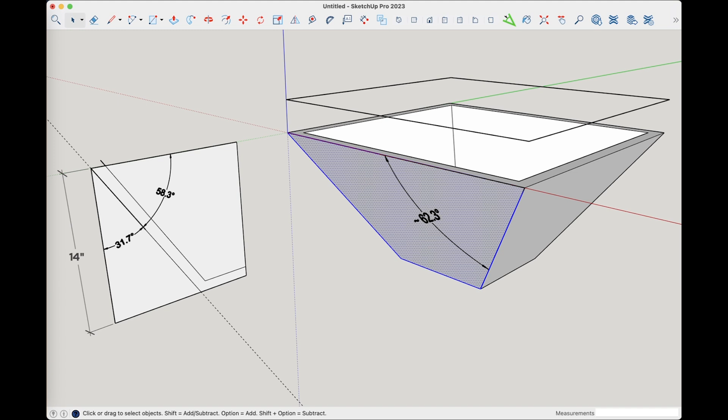So first, let me hang on to the one that we have. I'll just select that, and I'm just gonna group everything, and then we'll move that out of the way of where we're gonna draw. Okay, and I think that what I wanna do first is make the frustum a little bit shorter. I think that's gonna help with the proportions. Right now it's 14 inches, so let's try 12 and see what that does.

So I'll draw myself a guide, and we'll keep that same 1 inch dimension here. And then I'll just draw a couple of line segments real quick. I'm gonna do this pretty quick; I'm not expecting anyone to follow along. The point obviously is to show what it takes to do this by brute force in SketchUp, and then compare that to the parametric way. So if you're trying to follow along, don't worry about it. If you're fast enough to follow along, fantastic, but that's not the point of this particular exercise.

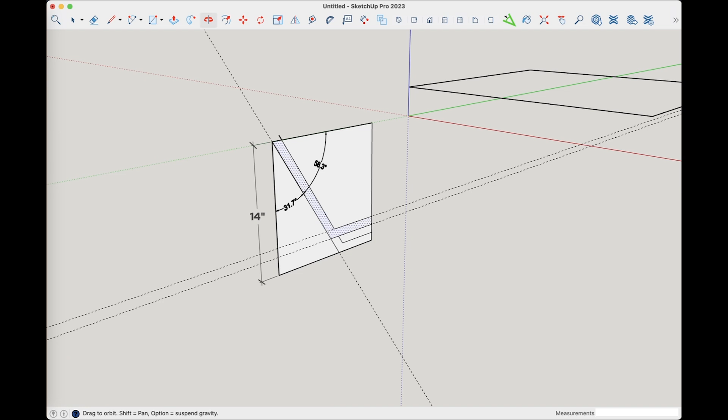And all I need to do is get rid of that segment there, and that will open up that part of the profile that we'll then use the same way that we did before as part of the Follow Me function. Okay, so let me look at this from an ISO view and zoom out just a little bit. Like before, I'm going to copy that over to the origin here, and then I'll select the path. I'll go ahead and select Follow Me.

And now, if we look at these from the front, we should have our same angles, right? Nothing changes, it's just shorter, still 62.3 degrees, but that looks a little bit better to me. It looks a little bit more balanced, the one on the left that's shorter than the one on the right that looks a little bit too tall and top heavy.

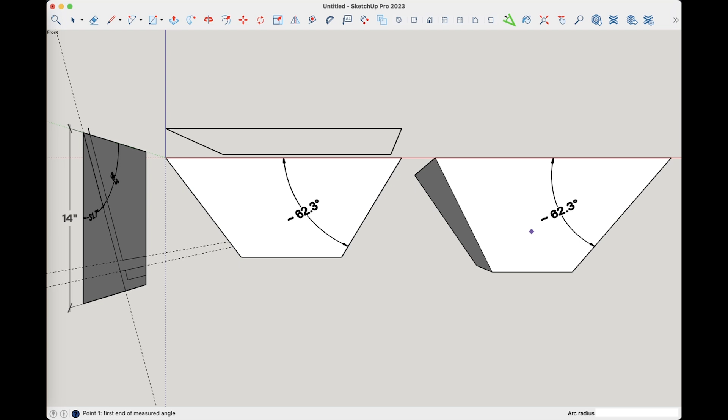So as we mentioned, ideally we're coming in at 14 to 16 inches tall for a fire bowl or fire pit. We don't want to be much taller than that. Shorter is okay, but ideally we're at 14 to 16 inches tall. This one's 12 inches tall, a little bit short, but again, proportionally looks better to me.

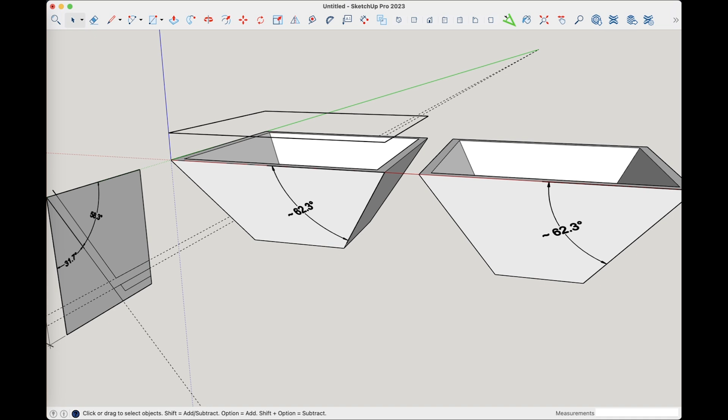Now, another way that we can augment our design here, let me go ahead and group this and get it out of the way as well, move these guys over, is instead of making it shorter, we can keep it the same height, but make the opening bigger. So if we move it from 28 to something like 32 or maybe even 36, I think the proportions will come better in line as well. So let's try doing that.

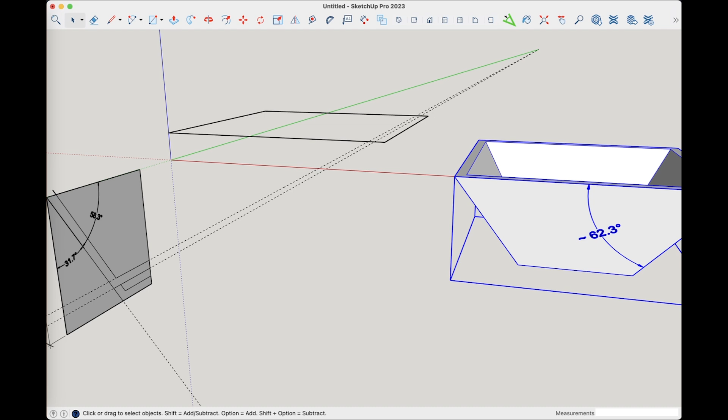So just like before, we'll draw another rectangle from the origin, using the rectangle tool. In this case, let's start with 32 by 32, just to see where that gets us. I'll need to get rid of this face, I don't need it. And I want to move that up from the origin just a little bit.

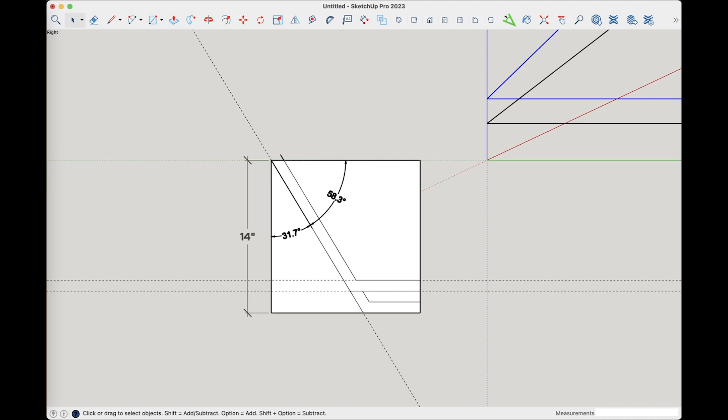Let's go ahead and return our profile here back to what it was before, that 14 inch height. I'll just move this line segment, close this one back off, and now we've got that. Let's go through the exercise again. I'll go to ISO view, copy that over to the origin, select our new path, the 32 by 32 path, select this, and now let's look at that from the front, zoom extents.

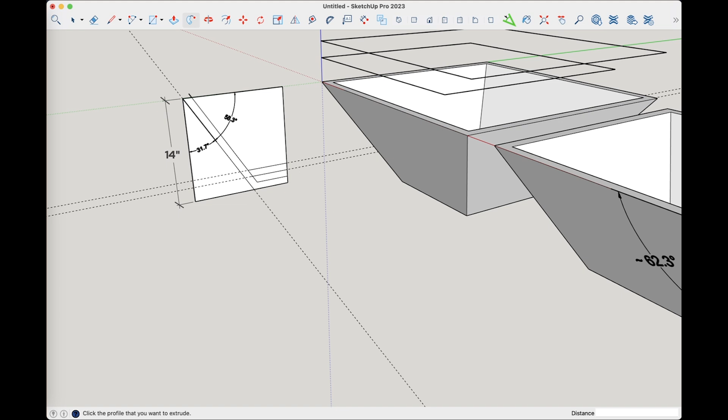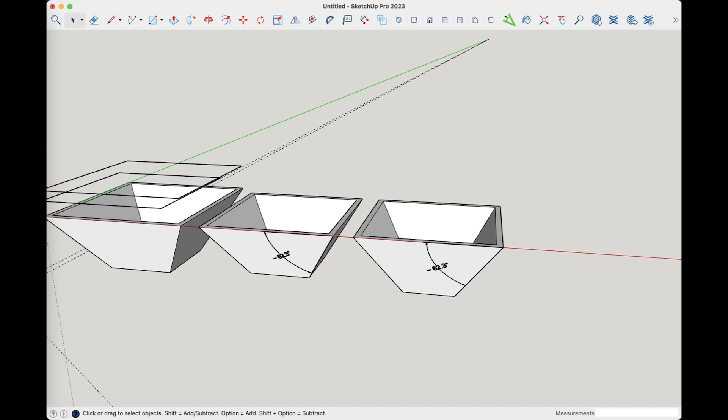That also looks better to me than this original one, but it is bigger, right? So it is 32 by 32 rather than being 28 by 28. And maybe 28 by 28 was all of the real estate that we were given, right? So that's kind of a consideration as well. But again, this one looks much more balanced than this one does, for the same height, right? So 32 by 32, 14 inches tall; 28 by 28, 12 inches tall; 28 by 28, 14 inches tall.

Another thing that we might want to do is play around with the different side angles. So we've got this kind of dramatic side angle here. Remember, we recognized a different side angle that was much steeper, 24.5. That also might be helpful. So let's go through the exercise and model that.

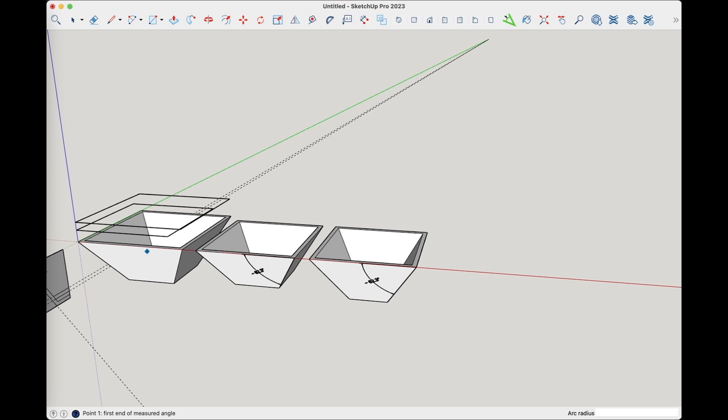Same thing here. I'll go ahead and annotate this guy right here. I should have annotated the heights as well, that would have been helpful, but I think we'll be able to follow them. So 62.3, select all that, select this, group them together, and let's move all of this stuff out of the way. I'm just moving right now, but tagging will actually be a better way to do this. Let's go ahead and move that.

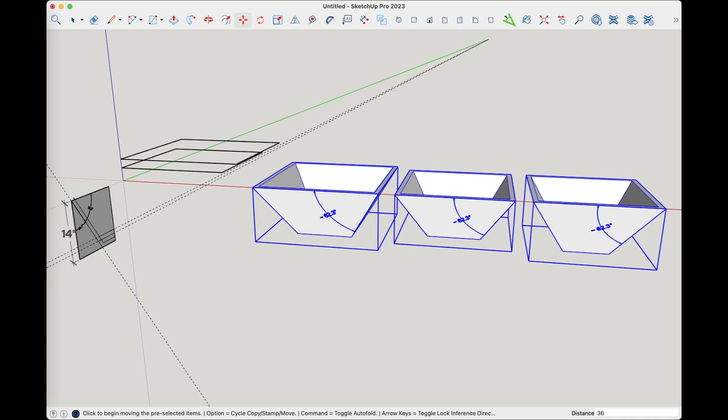All right, now let's change the side profile to that 24.5. So let me look at the model from the right-hand side, and zoom in on this right here. Let me just select all of this, and we will group that, and move it out of the way as well. So 20 inches, I guess.

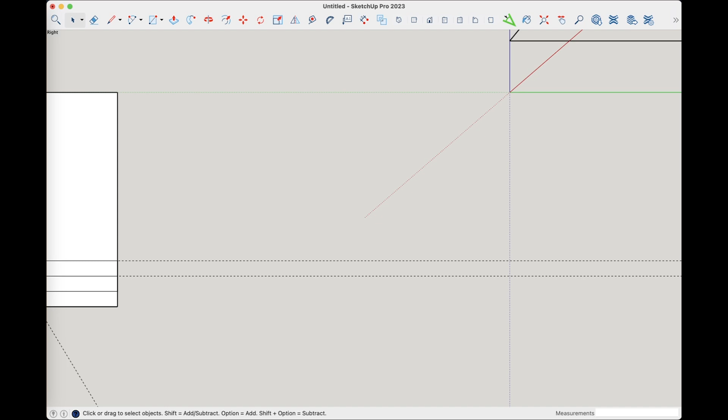Now, if you recall, the way we did this was we drew first a helpful bounding box, so 14 by 14, so we'll do that again. And then this over, we drew our guide here, so that now we want to be 24.5. That gives us that whole number blade tilt of 40 degrees. And this is going to be a much steeper side angle.

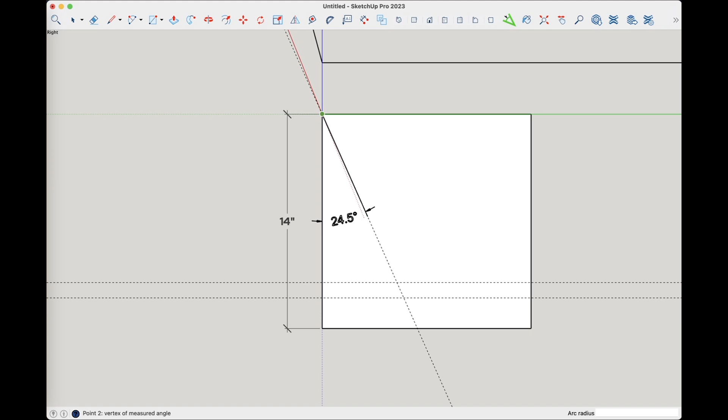Let me just go ahead and annotate these things real quick. So this will be, again, 14 inches tall. And this side angle will be 24.5, and its complement will be - what is that - 65.5, is that right? Draw our line to represent the side. We'll go ahead and select this and this, and do our thickness, 1 inch. And there's our alternative profile with a much steeper side angle.

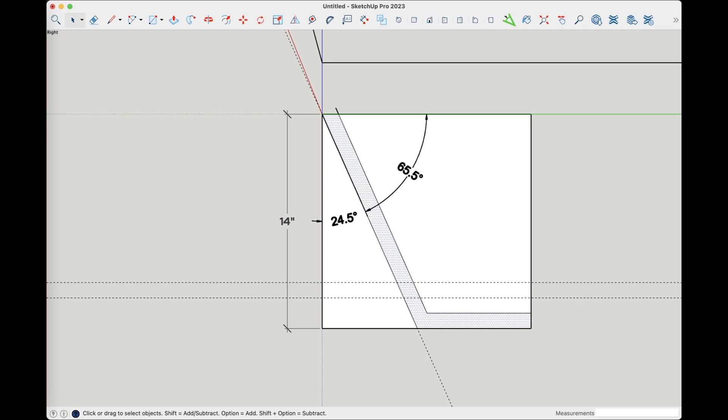Let's play around with that. So remember, we want to move this whole mess over so that we can get it out of the way of the origin. Let me just take the move tool, grab this corner and move it out of the way just a little, and we will copy move this new profile. Why don't we start with our 28 by 28, follow me, new profile, and then let's look at that from the front.

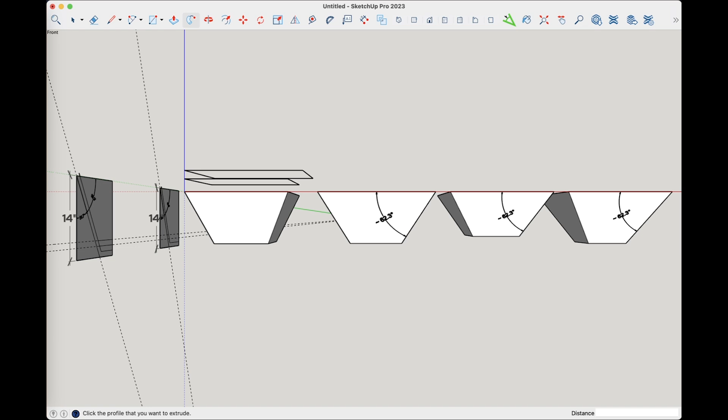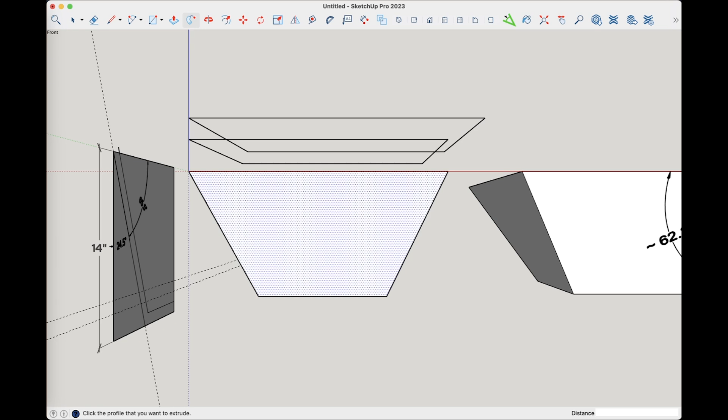That also looks better to me. So this is 28 by 28, it's also 14 inches tall, so just like our original, but a much steeper side angle. Looks more balanced to me than does this one over here, right? Again, this one is just giving me real fear of tipping over and causing a big old problem, whereas this one over here just looks more balanced and stable. And it's the same top dimension, 28 by 28, same height, 14 by 14, just a steeper side angle.

So let's go ahead and annotate this guy here, and select that.

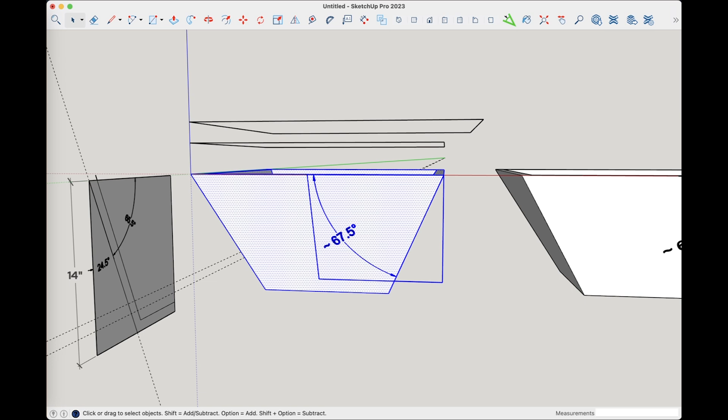And I'm not doing this on purpose, but this is getting tedious in a hurry in SketchUp, doing all of this manual mumbo jumbo. Select these guys, move all this stuff over, 2 over, 36 over. All right, let's try it one more time, but with that larger top open.

And mind you, all we've done so far is try a couple of different heights and 2 different side angles. We haven't played with the thickness of the frustum at all. We haven't changed much in terms of the proportions. Everything's been pretty rudimentary in the changes we've made so far, and it's getting tedious.

Nevertheless, one more, let's try it one more time. We will, again, copy our profile over, center, select our bigger opening, get it from the front. So much more balanced, but that one's almost a little too boxy. So it sort of depends on the situation.

I would imagine if that were a much bigger profile, like right now it's 32 by 32, but if we got to 36 or 48, it would look way too boxy, whereas something like this would actually look more pleasing. But again, we'd have to run through some more iterations to do that. You get the kind of idea.

Now, we could do some things here to organize a little bit. So one of the things we could do is tag things. So as an example, I could tag all of these. Let me go ahead and go to tags. We're going to need to create a new tag for this. We'll call this, this was the 31.7. Okay, I've got a new tag defined, and then I'll just enter the info, tag all of these with that.

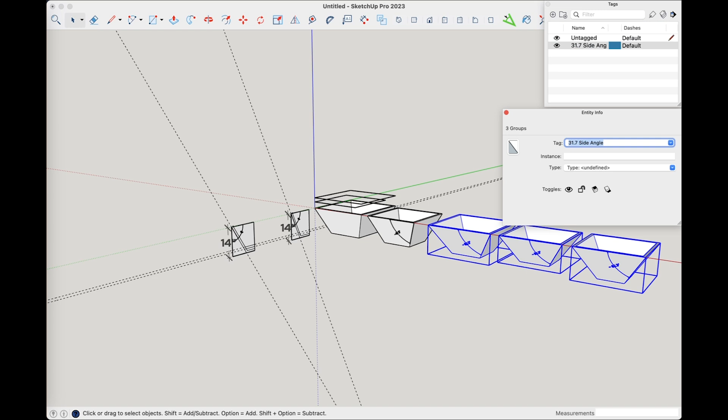And the benefit in doing that is I can now use tags to show and hide what's in my model. So you can have a bunch of stuff in there, but sort of unclutter it. We'll do the same thing with these two new ones that we just drew.

So let me annotate this real quick, select all that, plus that, and we'll tag those two. Let's create a new tag, and that is our 24.5 degree set. Entity info, tag those, okay.

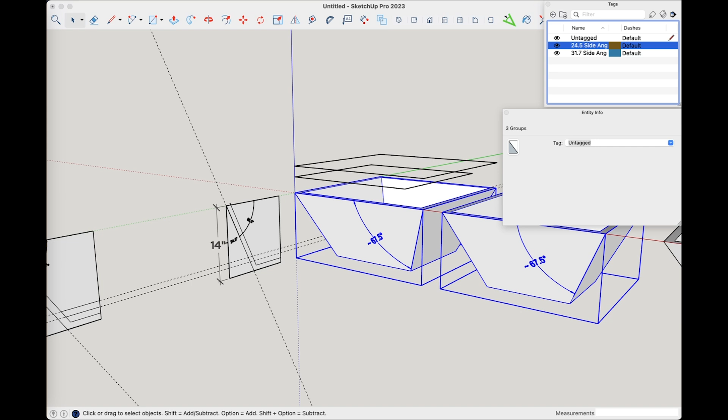And then if we zoom out, right, we can, I guess it would make sense to tag this as well. Let's tag this whole mess, including this, group that, tag that, show and hide that stuff. And then the same thing with this one. Entity info, that one is going to be our 31.7, right? And so we can do the same.

All right, so there you go. I didn't really create that many permutations, 5 total. One was the existing one. And then there were 2 permutations of that with the same side angle. One was shorter, one was the same height, but a bigger top. And then I created 2 more with the steeper side angle. Both of those the same height, one with a 28 by 28, the other with a 32 by 32.

Now, as you can see, this can get tedious in a hurry. We could either save each of those permutations as a separate design file or go through some sort of complex tagging approach to keep things organized. Now, adopting an approach like this at scale would be an absolute nightmare in my opinion. I could do the same in Fusion, but luckily there's a much better way.

So in this video, we're going to introduce a concept called parametric modeling, which, as I've started to ramp up on Fusion, has completely changed my perspective for the better on using it. Now, if you're not familiar with it, parametric modeling is a design approach that enables you to create 3D models based on a set of parameters or variables. These parameters can include dimensions, angles, distances, and other geometric properties that drive the shape and size of your model.

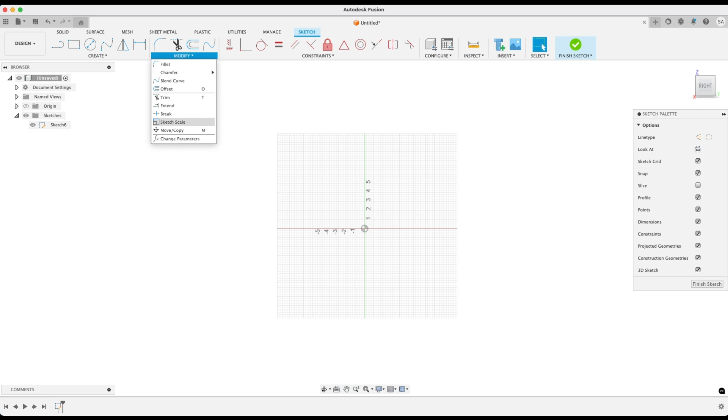And before we do anything else, let's now define several parameters. There's a few different ways to get to it, but one way is under the Modify menu, where you'll see this item, Change Parameters. You'll notice that we can now add user-defined parameters by simply clicking the plus sign, and the first one we'll add is height.

You'll notice it defaults to a dimension in inches, based on my default unit of measure, and that's exactly what we want. Now, for each variable, you can enter an expression that Fusion will evaluate for the value, but hold that thought, we'll come back to that. Keeping it simple for now, we'll just type in 14, which is the same height we used before when we modeled our first iteration.

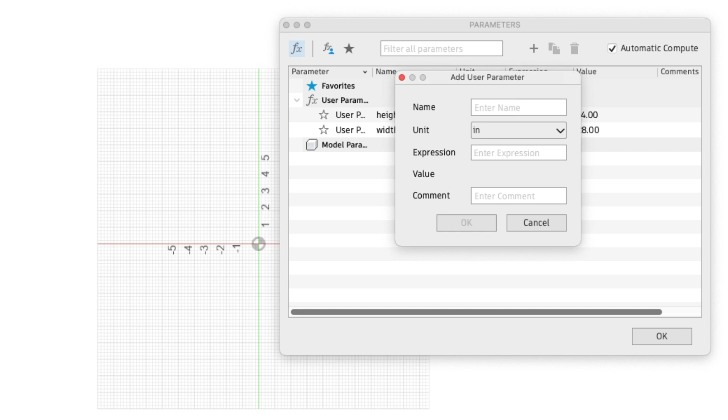Okay, next, even though we're using the same value, let's actually add two for the top dimension, width and length. For width, let's go ahead and enter 28 inches, just like our initial model. And for length, we'll get a little fancy and enter an expression of width. Notice how it knows the value of that variable. This is the simplest expression you can enter, where the value of one variable is exactly that of another.

But again, baby steps. Now let's see this work. Let's change the width, notice how length changes as well. Pretty cool. For now they will be the same, but keep in mind we can change them independently, and we'll come back to that later.

All right, next let's define a variable for our star of the show, the side angle. I'll go ahead and type in sideAngle, and every variable name needs to be one word, no spaces. In general, I like to use all lowercase for naming variables, but when there are multiple words like side angle, I'll use what's called camel case, starting in lowercase, and then every subsequent word starts with a capital letter. It just helps make a variable easier to read.

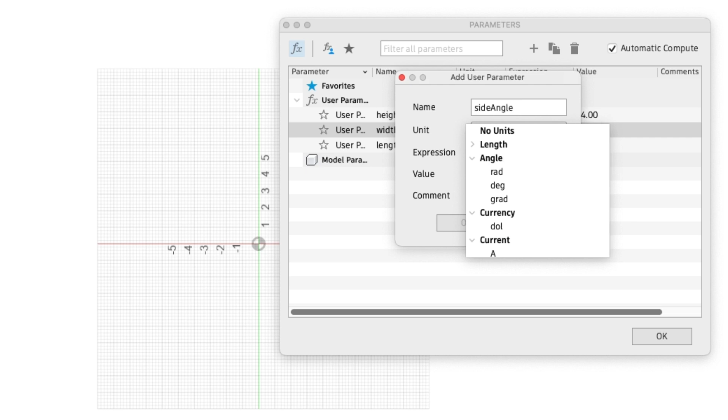Also keep in mind that we are defining an angle, so we need to change the unit here from inches to degrees. As you look through this, notice how there are different types of units and different units of measure within those types, so you can use whatever's most appropriate to you. But remember, it's important that we use a unit here, in this case degrees, to represent an angle, not distance. Okay, just like before, we'll use a side angle of 31.7 degrees to start.

All right, let's get a little tricky. Let's add another variable called sideAngleComplement. As you may recall, the side angle from our compound angle calculator represents the angle from the vertical, but in Fusion, a line's angle is represented from the horizontal. And so we need to use the complement of the side angle to properly model that.

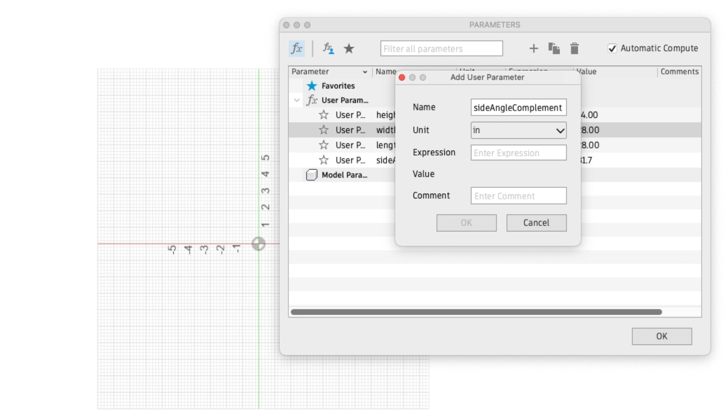Now, we could just enter the value of that complement in our side angle variable, but for me, at least, this makes things so much easier, because I can represent the side angle exactly as it's specified by the calculator, and then have a variable in here whose expression does all the work and computes the appropriate complementary side angle for me. So again, the unit for this will be in degrees, and the expression in this case will be 90 minus sideAngle. That's the expression that will evaluate to the complementary angle of that side angle.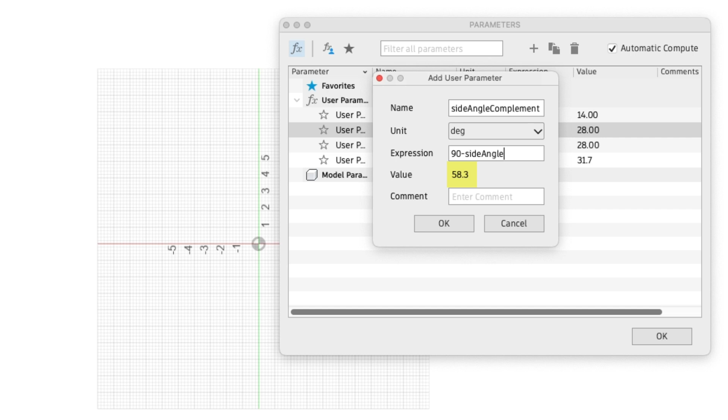And notice how it accurately represents 58.3 as the value of that expression given the current side angle of 31.7. All right, let's add one final one to represent the thickness of our frustum. Again, this one is not super important for our current exercise, but to be thorough and accurate, it makes a lot of sense to model the thickness of the frustum as a parameter as well. Downstream, this will allow us to do all kinds of things like automatically calculate the volume, which will then help us calculate batch size, weight, etc.

So we'll define thickness, and it's also appropriate to represent in inches, and we'll simply start with 1 inch for our thickness. All right, now that we have those parameters defined, let's go ahead and actually use those in our sketches. We've already started to sketch here. Let's now model the frustum profile. Just like before, we'll start by drawing ourselves a helper bounding box that represents the height of the frustum. And we'll use a 2-point rectangle for that.

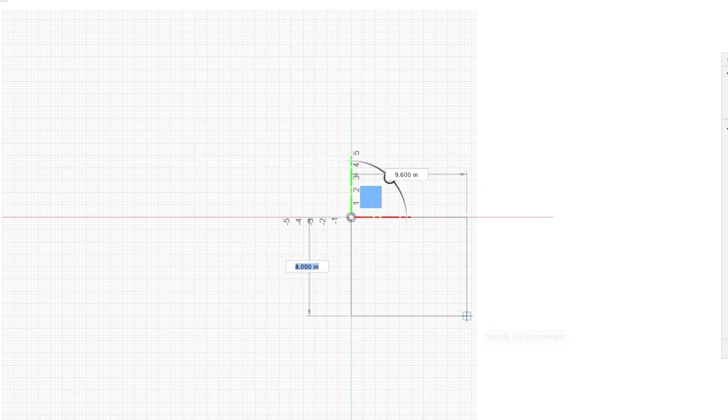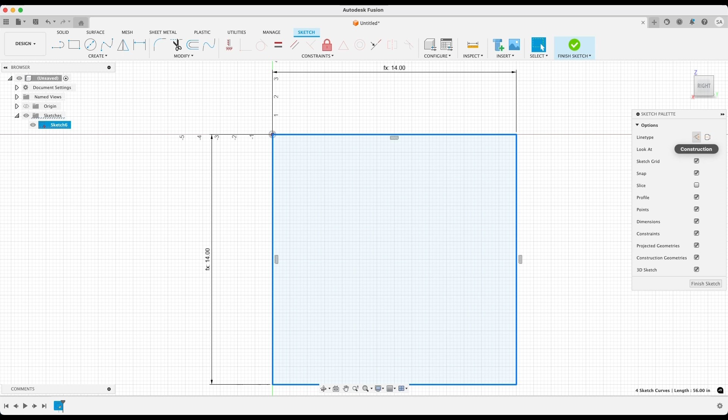Click in the origin, drag out, but instead of entering values directly, notice as I start to type in the word height, Fusion knows that I'm referring to and wanting to use that variable. Go ahead and hit enter, and then I can tab over to the other input field, enter the same for that, hit enter, and then hit enter again to complete the rectangle, and bang, there's our 2-point rectangle that happens to be 14 by 14 in dimensions based on the current value of the height parameter. Next, let's go ahead and identify that as a construction line, just like we did before. Double click, and then click on the construction button on the right-hand side.

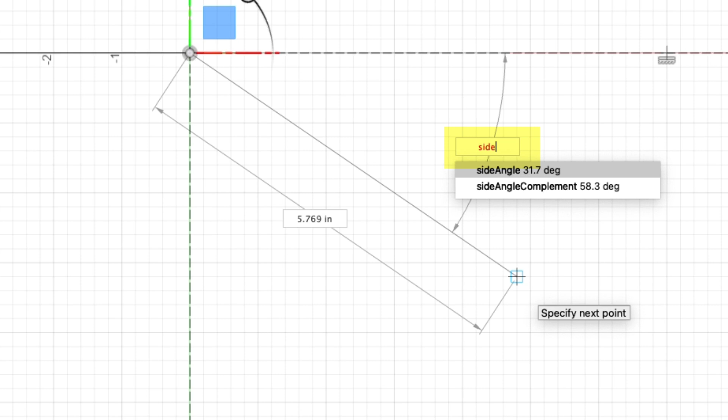All right, next, let's go ahead and draw a line to represent the side angle of our frustum. And just like before, start at the origin, go out along the horizontal axis, and then rotate down. And remember, we are currently in the length field, so we need to tab out of that to enter the side angle. And here's where we can use that special variable we defined, side angle complement. Go ahead and enter there, and bang, there we go. Our line is now constrained to that value, which happens to be the complement of the 31.7 degree side angle, which evaluates to 58.3 degrees.

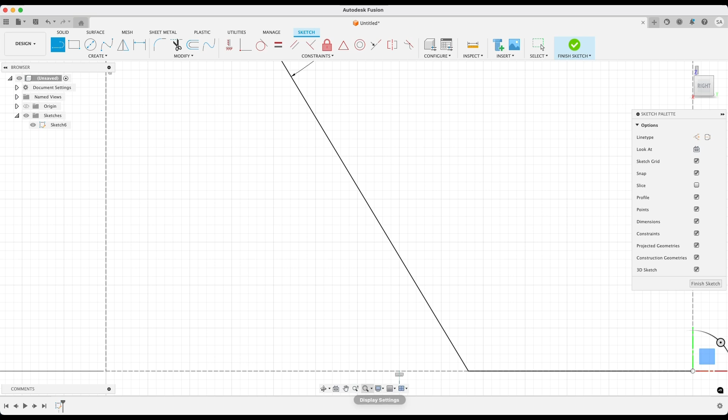Just like before, we'll now drag that out till we intersect the bottom construction line and finish that line. Next, we'll draw another line segment from there over to the bottom right corner of our construction box, and that represents the outside of our frustum profile. All right, next, let's model the thickness. And just like before, we'll use the offset tool for this. Click on the line segment for our side angle that we just modeled. And just like before, we can drag one direction or the other. And as you can probably guess, we'll use our thickness variable here.

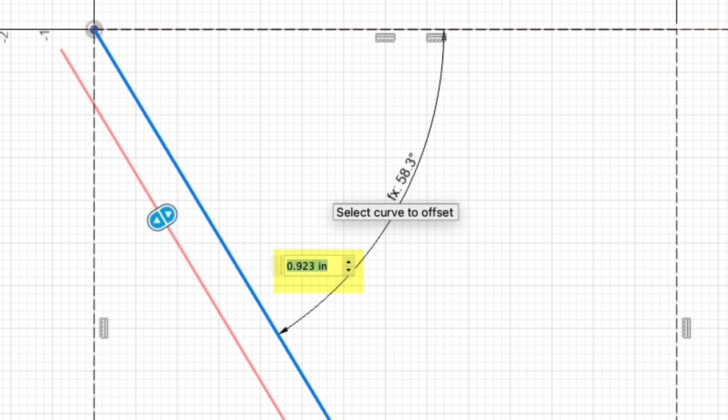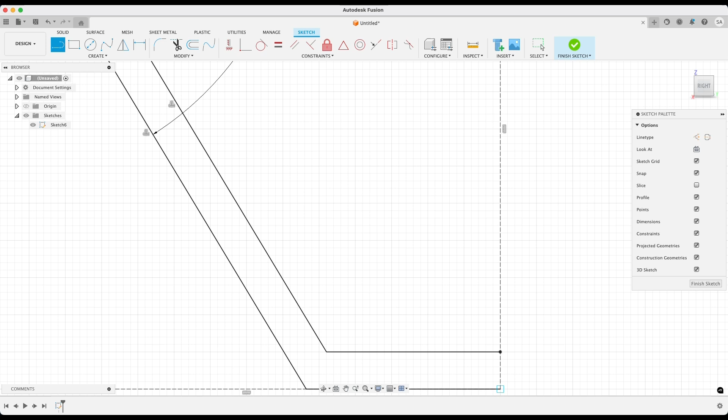But remember, Fusion uses a positive and negative number to represent the direction of the offset. So in this case, we'll need to enter negative thickness to properly represent that offset. Hit enter, and there you go. There's our thickness, in this case, a 1-inch offset. All right, just like before, we need to finish off our profile to create a closed face by drawing the short line segments at the top and bottom of our model. And just like before, if we've done all of that correctly, we'll get that visual confirmation that we've closed off the face. It'll turn blue inside there, and there you go. We now have a profile for our frustum modeled the parametric way.

All right, before going any further, let's test out and put those parameters to work. As I mentioned before, there's a number of different ways to get to the change parameters dialog. In this case, I'll type S to bring up the search box. You can do this anywhere in Fusion to quickly get to functions and capabilities. Next, I'll type in change, and then you'll notice the list shows a bunch of different options or functions, and I can select change parameters from the list of results. That will open the parameters dialog.

Now let's make some changes. All right, first, we'll change the height. Let's go ahead and change it to 16. Next, let's change it to 12. And notice how the model reflects those changes. Same with the thickness.

Let's go ahead and try 1.5 inches. Let's try 3 inches, a little bit more obvious. And now let's change that side angle. And remember, we have several side angles that we know from our calculator dictate whole number blade tilt angle. So another of those is 33.8 degrees. So let's go ahead and enter that.

And it's actually easy to miss, but it's so awesome. Notice how Fusion is computing the side angle complement. So 90 minus 33.8 is 56.2. And then using that for the value of the side angle in the model. Try it again. This time, let's use that other side angle, 24.5 degrees, and bam, pretty freaking cool what's going on here, and we're just getting started.

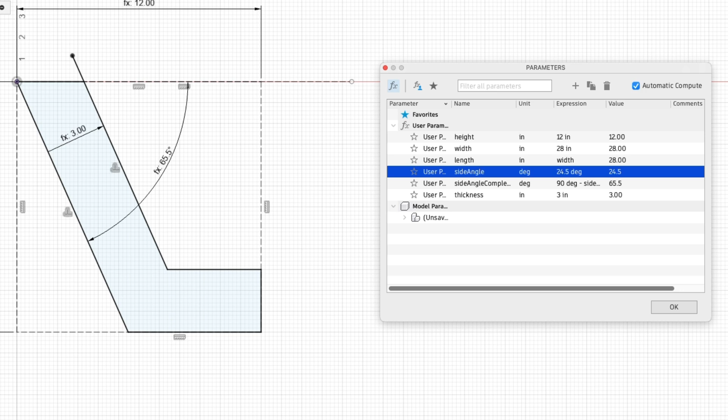All right, let's go ahead and return those values to match those of the initial version of our model. So 14 inches for the height, 1 inch for the thickness, and 31.7 degrees for the side angle. Go ahead and close that out, and let's finish the sketch, and then we can rename it something like Parametric Frustum Profile.

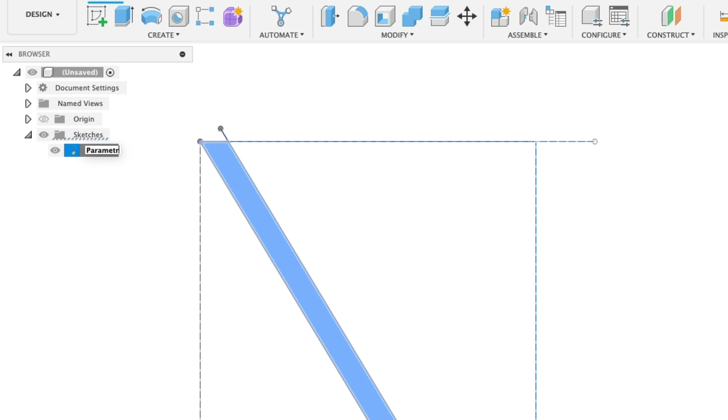And once we've got that, let's go ahead and move on to model the frustum top for the path to sweep that profile along. All right, now that we have the profile, let's model the top of the frustum for the path. And you can probably guess how this is going to go. Let's first create a sketch, and like last time, select the XY plane. Next, we'll create a 2-point rectangle to represent the top of our frustum, and we'll start at the origin.

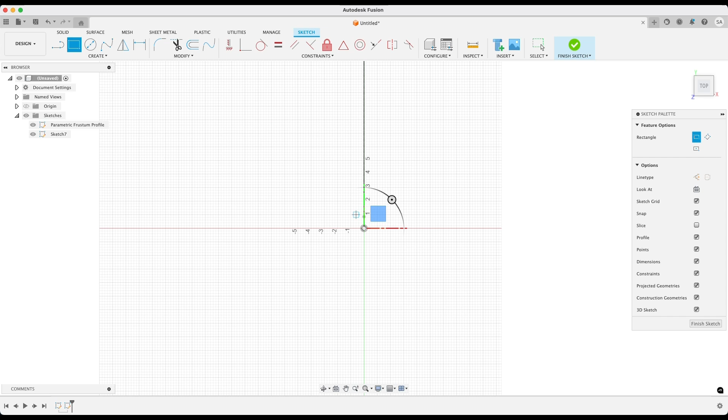And just like in the profile example, we'll use our parameters to represent the length and the width of the frustum, both of which happen to be the same at this point because one is simply referencing the other. Again, notice how it evaluates those to 28 inches. Couldn't be easier. At this point, we're done with this sketch, and we'll click Finish Sketch. And then let's go ahead and rename this sketch something like Parametric Frustum Path.

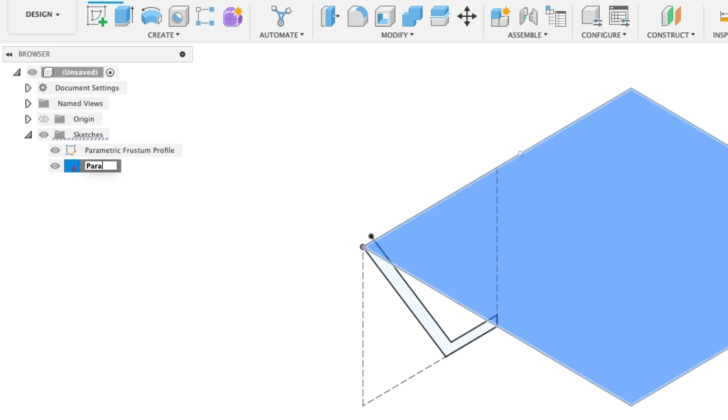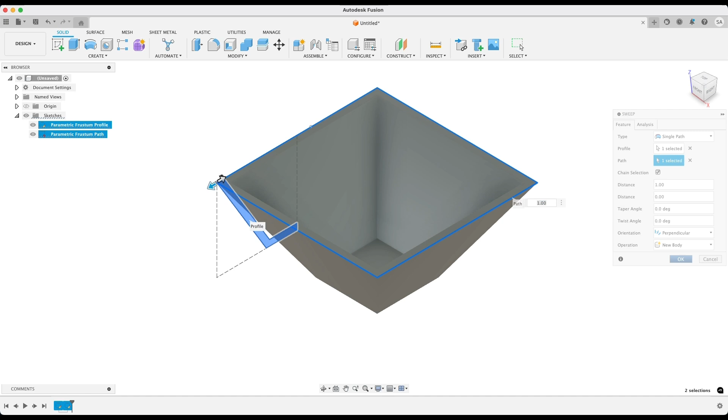All right, now that we have the profile and the path, we can use the sweep command to create the frustum body. Just like before, select Sweep from the Create menu, select the profile first, then select the path. There's our frustum. Now let's have some fun. We'll go ahead and bring up the Change Parameters dialog again by typing S, searching for Change, and then selecting Change Parameters from the list. And now, let's start changing some values.

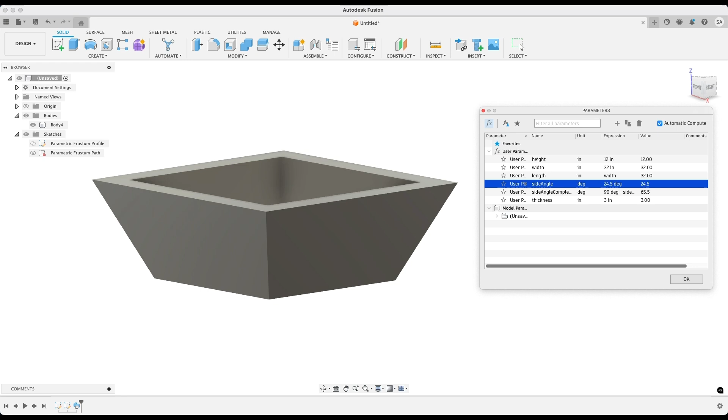First, let's go ahead and change the height from 14 to 16, and then to 12. We can also change the width and the length to 32. And for fun, we'll change the thickness from 1.5 to 3 inches to really be able to see it. And of course, the big one, let's change that side angle. First, we'll change it from 31.7 to 33.8. And now let's change it to 24.5. Pretty friggin' cool. This is the kind of capability that's winning me over.

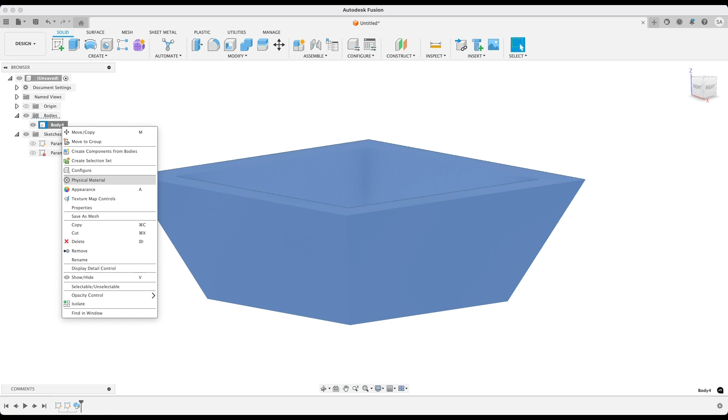Now, taking this a step further, while we are modeling the pattern for tooling, I can also get some information about this object through its properties. I went ahead and added the custom material to Fusion to loosely represent GFRC, which I believe is approximately 132 pounds per cubic foot. So I can apply that material to this body. And then when I look at the properties, it's in ounces and cubic inches. So let's convert those. We'll do a quick conversion. And those give me some incredibly useful look ahead information to use in my design process.

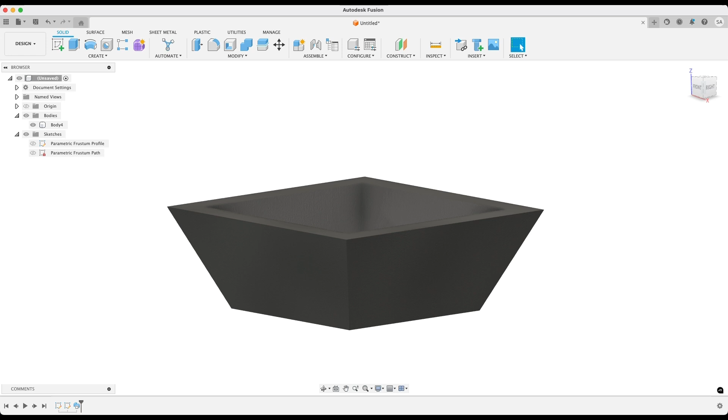All right, I hope you found that helpful. It was definitely an eye-opener for me as I started to dig into Fusion, and again, has completely changed my perspective on using it. As I've mentioned, I'm not much of a designer. I know what looks good and what doesn't when I see it, but I don't necessarily know it ahead of time. With parametric modeling and the ability to rapidly iterate, Fusion is actually making me a better designer. It's helping me create better, more aesthetically pleasing, functional elements, while also accelerating my process, cutting down on unnecessary errors, and being most efficient with materials and resources in the shop. This is how you multiply your time.

In the next video, we'll do just that. We'll take our design and start to apply CAM concepts for things like cut lists and tool paths to help accelerate fabrication. I'll see you in the next one.